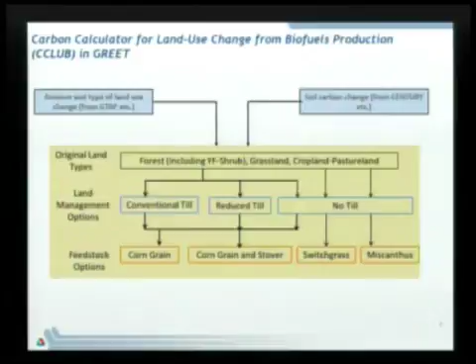There are several factors that affect land use change GHG emissions: crop yield on existing cropland versus new land, and global yield differences and potentials. These are important factors rolled into CGE models to generate results.

The next group is available land types. We know cropland, grassland, forest land, wetland, etc. Different lands can roll into cropland to grow corn and other grains. In the last several years, significant effort has been made in those models to update the land availability data.

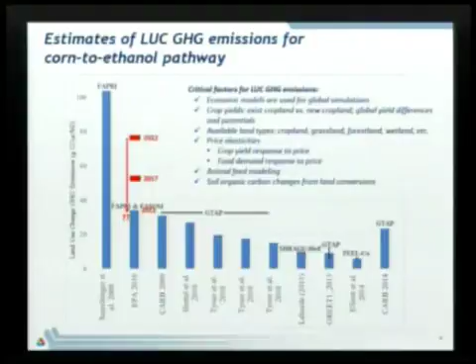So to roll all the results into GREET, this is the summary of what we see from GREET modeling, putting all those critical factors in. As you can see, for corn ethanol versus gasoline, even with land use change, we see a reduction in the 25 to 33% range. And of course, when we move to sugarcane, corn stover, switchgrass, miscanthus—the so-called second generation biofuels—we have significantly increased GHG reductions.

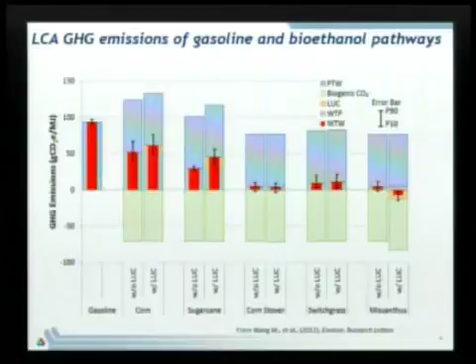And some of us may still wonder about the energy balance debate of corn ethanol, whether corn ethanol has a positive or negative energy balance. Here is our GREET simulated result.

So we conclude that because of the advancement in farming and ethanol plants, corn ethanol indeed has a positive energy balance. In fact, the energy balance is 10.1 megajoule per liter of ethanol produced. In terms of energy ratio, it's about 1.6. Of course, other second generation biofuels have a larger energy ratio.

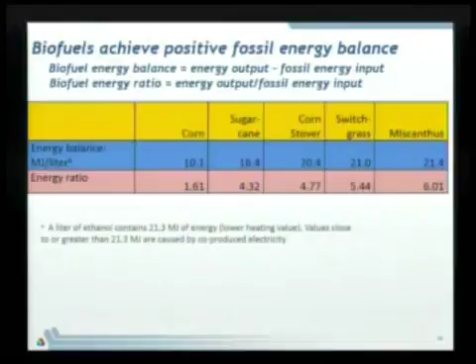So, some new trends for ethanol production. In the last several years, ethanol plants started to extract oil and use the extracted oil for biodiesel production. So we now configure the biodiesel production from corn oil in GREET 2014. You're going to see GREET 2014 in 2 weeks.

Another new trend is production of corn grain-based ethanol and stover-based ethanol. We've seen the plant just came online a few weeks ago, where the 2 plants are co-located, so you have some heat integration to benefit both sides of the fence. So we are examining this new unique co-production of ethanol in GREET 2014.

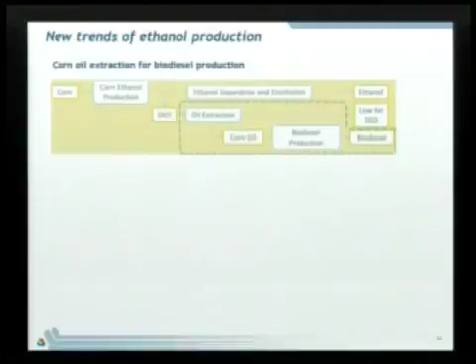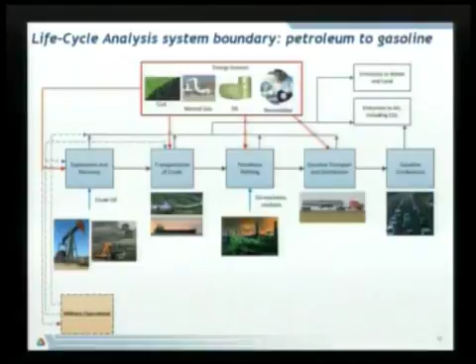So now let's quickly go through our result for petroleum to gasoline. This flowchart summarizes our system boundary for petroleum to gasoline. Of course, we include all the major activities for the gasoline pathway, as you see in this flowchart.

And in the last year also, we started to address a few critical issues for petroleum fuel pathways. For example, we spent considerable effort to address petroleum refining to gasoline, diesel, jet fuel, and others, with LP modeling effort to address refinery efficiency and emissions. And we have 2 journal articles published to document our findings.

And for oil sand, we update energy use and GHG emissions of recovery activities with Stanford University. And we address the land disturbance-related GHG emissions with UC Davis. So the results are rolled into GREET 2014.

At this point, we are analyzing some other crude types. For example, the tight crude production in the Bakken play and the tight crude production in the Eagle Ford play, especially the natural gas flare in the Bakken play. So we anticipate to have results in a few months to roll into GREET.

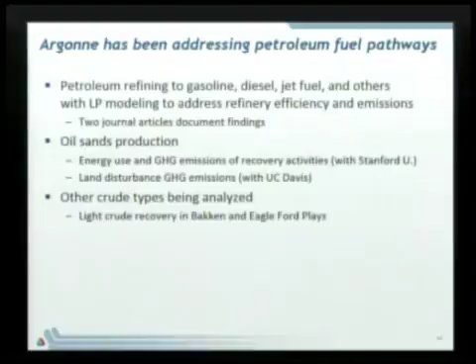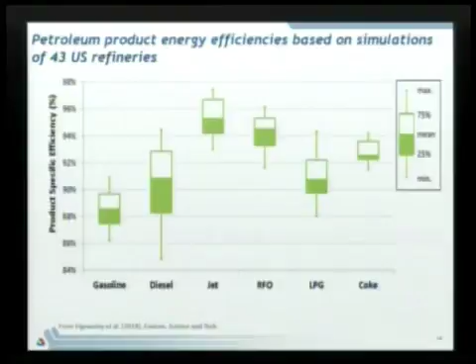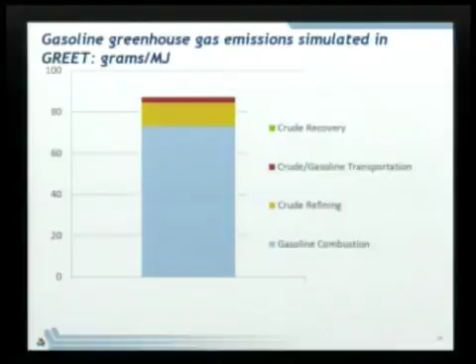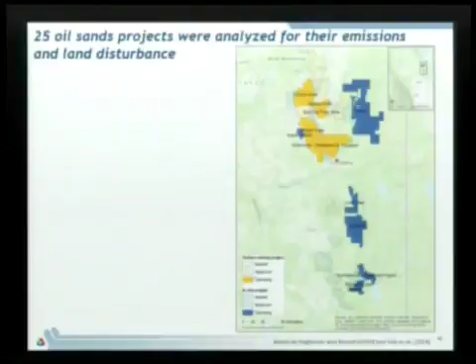And on the other hand, if we look closely at the oil sand result, with our collaboration with Stanford University and UC Davis, we addressed 25 oil sand projects in Alberta. Here are the project distributions in northern Alberta. So we have both mining operations and in situ operations. And here are the results from this effort.

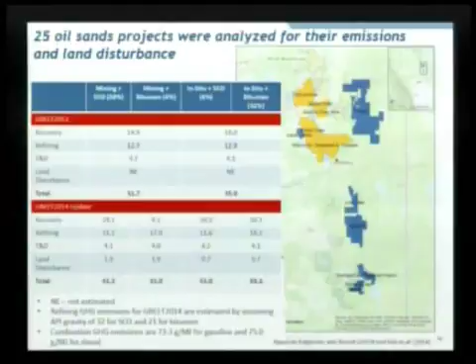So the table above, GREET 2013, is what we have now. The new result is GREET 2014 update, as you see. We see a significant increase in oil sand related pathway carbon intensity. For example, for mining operation, we increased from about 32 grams to about 41 to 51 grams, depending on the type of product. For in situ, we increased from 35 grams to about 43 to 51 grams. So these are the new results you're going to see in GREET 2014.

So just quickly in conclusion, technology improvements in ethanol plants and corn farming have helped reduce corn ethanol GHG emissions. Land use change modeling for corn ethanol has improved in the past 6 years with reduced moderate land use change GHG emissions. But uncertainties and confusions remain, and the debate continues, as we all know.

So this is where I hope that the community together can address this, because we know what are the key factors that drive the result differences, and the community and agencies together can get some of the issues resolved, so we can have better results and more transparency in what are the critical factors causing this important result. And on the other hand, the transition to cellulosic biofuels will result in greater GHG reductions. Thank you for your time.

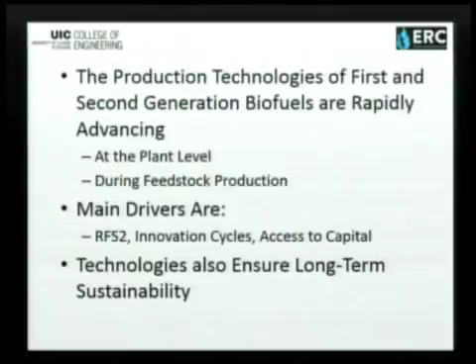This is a list that's hard to read, and it's hard to read because there are a lot of new technologies going into ethanol plants. I mentioned combined heat and power technologies, which are more traditional industrial energy efficiency technologies. But there's also new processing technologies like selective grinding technology, protein recovery, more sophisticated animal feed production at the back end, which is a very important point for a corn ethanol plant. It's a big component, and I'll come back to that later. And that's just on the ethanol plant side.

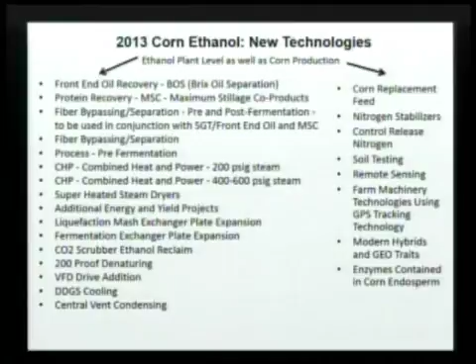Then on the feedstock production side and the corn production side, we've also seen large pushes in technologies: new hybrids, GPS technologies, auto steer on tractors, variable rate nutrient applicators, nitrification inhibitors that prevent runoff of fertilizer. So it's been a very vibrant and active field in that space. And what have all these technologies brought?

Well, on the plant side, we've seen a significant reduction in thermal energy use, meaning natural gas use. In 2001, we used 36,000 BTUs to produce a gallon of corn ethanol. In 2012, we used roughly 24,000 BTUs per gallon. During the same time, we've seen a 7% yield increase at the plants. Electricity use has also gone down during the same time frame.

And one of the technologies that Michael mentioned that we've seen rapid adoption in is corn oil separation, the production of a separate fuel product, because most of the corn oil goes into the biodiesel market or the animal feed market from that same feedstock. We've also seen a reduction in water use from about 5 gallons only a couple of years ago to now about 2.5, 2.7 gallons per gallon of ethanol produced.

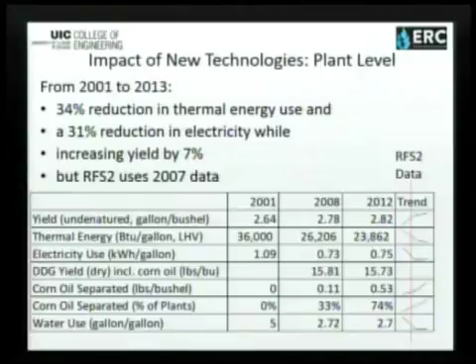One point I want to make is we're obviously a huge supporter of the RFS2 and have provided data and review. Updated modeling, in my opinion, is needed at EPA to reflect these new numbers. Back when RFS2 was modeled, they used the latest numbers, they used good numbers, but it's a very rapidly advancing industry and technology, and we need to update the numbers there. I've just shown you what happened on the plant level.

Well, on the corn feedstock level, we have seen, no surprise, record yields this year. We're going to be expecting 170 bushels per acre on average across the U.S., across the 2,500 counties that grow corn. And that is significantly up from the 5-year trend. But even last year we had very high yields.

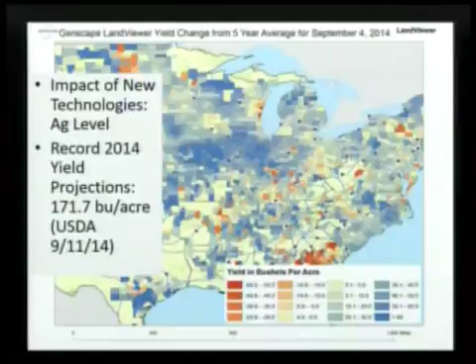And even during the drought year in 2012, we did not have a crop failure as would have been expected from the prevailing weather pattern. We still grew a very sizable and robust crop back then. And that is due to the new technologies, the new seeds, and the new agronomic practices. A couple of technologies worth mentioning here, especially corn kernel fiber to ethanol.

New enzyme manufacturing, new enzyme products really make it possible to turn 6 or 8 or sometimes potentially 10% of corn kernel fiber, to turn corn kernel fiber into about 6 or 10% of additional ethanol at traditional starch ethanol plants, and that's cellulosic ethanol, right, eligible for D3 RINs. We've seen Quad County Corn Processors adopting that technology, just started up in July very successfully.

Remember when I told you that corn oil separation was very rapidly adopted within 5 years by almost all plants? There is a potential for that technology to be rapidly adopted as well, because it's ready. And the potential with that is 1 billion gallons of cellulosic ethanol just out of the existing fleet of current starch ethanol plants.

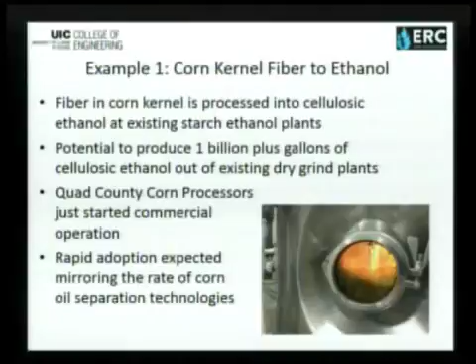Example 2 is corn replacement feed. I want to talk about that just for a little bit because it really speaks to the land requirements for corn ethanol production. What's been happening is that higher corn yields have also increased the amount of plant residue that is left after the harvest. And it's becoming a management issue. So a lot of growers have started to remove it. And many times it goes into bedding or it goes into animal feed. If you pre-treat it with 5% lime to increase digestibility, it can go into an animal feed.

Obviously the removal rates vary by region, right? There's a certain sustainable removal rate, beyond which it does not significantly impact soil health, and we have to be very mindful of that, right? That we do not deteriorate soil health. But the appropriate removal rates can be pretty easily determined.

So if, for example, at a 170 bushel per acre field, we remove 30% of corn stover, right? That's equivalent to producing an extra 50 bushels of corn from that field. Again, it's like getting a 30% land use credit. That is animal feed grown on land that's not, basically we don't need this land to grow this portion of animal feed. It's a land use credit.

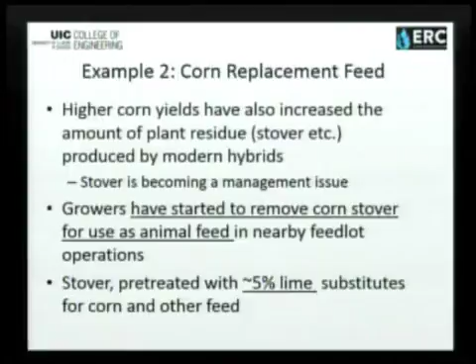And I want to conclude my presentation with the thought that I said earlier. I think it is important to prove and record the sustainability of the industry. Whether this is during RIN verification, as the EPA has instituted quality assurance programs that verify that a RIN is truly a RIN and prevent fraud. So we all know if we buy a gallon of renewable fuel, it was produced under renewable conditions, and it is what it is. Very important.

There are also third-party verifiers out there. There's a tool being developed that allows benchmarking of fields, farms, to see where they rank in their sustainability efforts, and there are certification agencies out there like International Sustainability and Carbon Certification that certified a lot of ethanol going into the EU back when there was still a market, before the EU imposed a tariff. But I think sustainability efforts should be supported.

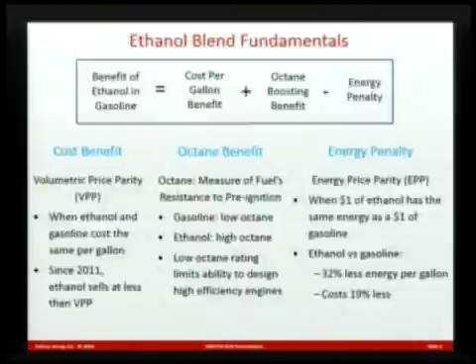Being kind of a curious person and into economics, we wondered why that happened. The one thing that correlated was the expiration of the tax credit for corn ethanol and the lifting of the tariff on imported ethanol at the end of 2011. That seemed to change everything.

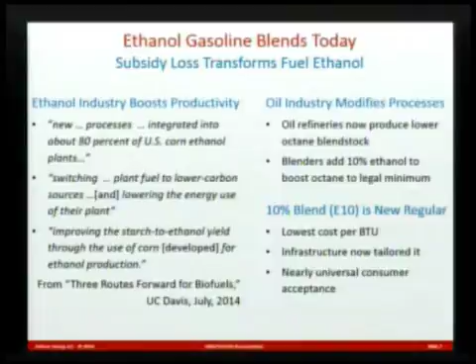The bottom line here is that, like milk, studies about the economics of ethanol tend to have an expiration date. You probably shouldn't use it if it was done before 2012. In fact, some of the government models that model the economics of ethanol actually have built into them the old assumption that ethanol and gasoline cost the same per gallon. They don't anymore. And even if the study was released after 2012, you have to kind of dig through it.

There's the NERA study that API put out, and I have a lot of respect for NERA. They're one of the really good economic analysis firms. They published a report in October 2012. Well, it turns out that phase one of that report, that everything was based on, was actually published in November 2011, before anybody foresaw what the effect of the elimination of the tax credit and tariff protection would do to the economics of ethanol.

Similarly, the latest CBO report has 21 studies in it that were published before 2012. So if you go through that report and take a Sharpie and mark out the findings from all the older reports, it's a much different report with much different findings than the one most of you have read.

So now I want to go on to octane, because that's really what I'm excited about as a former engineer, an auto person, and I'm kind of nuts about cars. I would like to see more of it.

Ethanol. First of all, octane can be boosted two ways. Blend stock is 84 octane and can't be used in the car as is; it has to be boosted at least another 3 octane points to be legal. You can either do that at the refinery or using ethanol. If you do it at the refinery, it's going to cost money to take that lower octane blend stock and boost it.

How you calculate what that cost is, is kind of a controversial subject, and the oil companies aren't exactly forthcoming about those sorts of things. So there are 3 studies I looked at. The one we did came up with 11 cents a gallon to get that additional 3 octane. APF Economics calculated it using a different methodology at 11 to 17 cents, and Hart Energy came up with 14 cents. So I think our 11 cents looks pretty good, all things considered.

So that's what it would cost if you didn't have ethanol. Now, if you use ethanol and add that 10%, you can boost the octane by 3 points, making the gas legal, and reduce the price at the pump by 5 cents a gallon, because ethanol is cheaper. That's the difference at the pump. If you use pure gasoline, it costs 11 cents a gallon more than blend stock. If you use ethanol, it costs 5 cents a gallon less than blend stock.

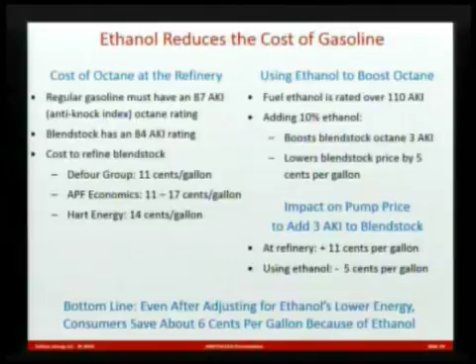So even after you consider the energy difference I talked about, right now gasoline to the consumer is about 6 cents a gallon cheaper because ethanol is used to boost octane rather than doing it at the refinery. Multiply that over 120 billion gallons, and as Everett McKinley Dirksen said, a dollar here and a dollar there, and pretty soon you have real money.

So this octane benefit can even be applied to higher blends of ethanol. The highest blend for sale right now is E85, 85% ethanol, and it's never been a value proposition for consumers. But some enterprising ethanol producers... now, to make fuel ethanol you have to denature it, because otherwise people would be more likely to put it in their cocktails than their gas tank. The oil companies denature it by putting in blend stock at 2 to 5%.

The ethanol producers do it by putting in something called natural gasoline, which is actually a natural gas compound. It's a liquid with properties very similar to gasoline, but it only has about 30 to 50 AKI octane. Of course, if you insert that into ethanol, it doesn't make any difference. So these ethanol producers said, why don't we put more in, create E85, and sell it directly to retailers?

And that's happening all over the Midwest. In Michigan they call it the Yellow Hose program. What happens when you do that: we had calculated you needed to sell E85 at 72 cents a gallon less than regular in order to make it a good value proposition. In the Yellow Hose program, it sells for $1 a gallon less than regular.

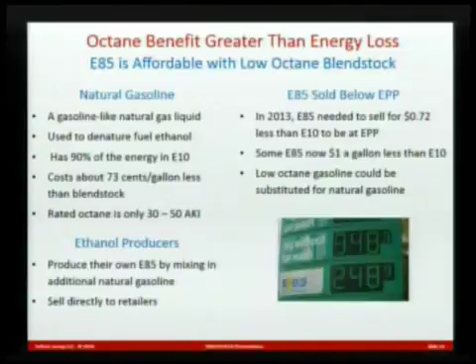But the real question we ask is, what's the sweet spot? What's the best blend? I'll get to that in a minute, but first I want to point out — I mentioned energy price parity earlier. It turns out that depending on who you look at, or what studies you look at, that may happen soon or may happen later. This chart shows the price of ethanol as a fraction of the price of gasoline. If you look down there, you see my energy price parity line.

The University of Missouri estimates that the price of ethanol versus gasoline will fall and actually be below energy price parity this year. The CBO, in their report, and you have to go to a footnote to find this because they don't really trumpet it, looked at futures prices and decided that by 2017, the price of ethanol would be about the same as that of gasoline on an energy basis.

So here's two different groups coming up with basically the same idea. Sooner or later, ethanol is going to be selling cheaper on an energy basis than gasoline. And that, of course, changes everything. Almost anything you put ethanol in will be cost effective.

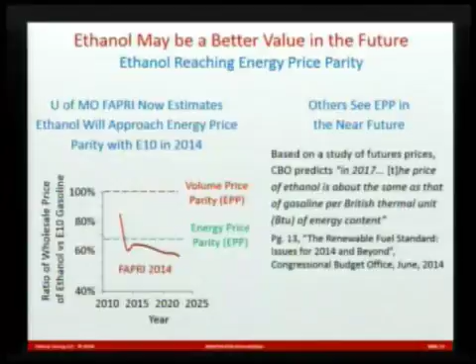But then we ask ourselves, what's the most cost effective way to use ethanol? And the most cost effective way is to maximize its octane boosting potential. Now there's various names for what you might call this concoction. We like to call it eco-performance fuel, or EPF. I hope to get royalties on the name tag, maybe, to augment my pension.

But the auto industry says that what they want is 98, what's called research octane number, which roughly corresponds to the 93 octane that's in premium gasoline today.

Now, ideally, you'd want this to be made with proven components, because the history of boosting octane has not been good. They started out with lead, then they used MMT, then other compounds. They all got banned for environmental reasons. So it's really nice if you could start out with something where we know what the environmental effects are. Ethanol fills the bill for that.

It's already successful in E10, so if you add more to the gasoline, to the blend stock, to bring the octane up to 98 RON, where premium is, you would create a fuel that would allow the auto manufacturers to increase engine compression ratios and improve efficiency, meaning lower CO2 emissions, better mileage.

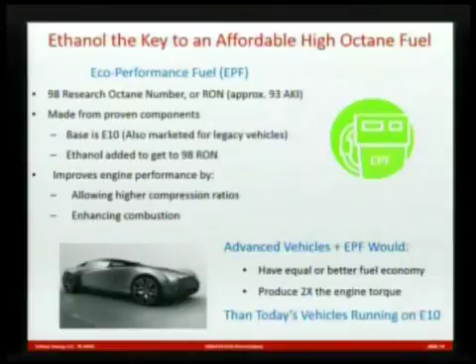It's cleaner, as I mentioned, because of lower CO2 emissions and also lower toxics, because in order to take gasoline at the refinery and boost its octane, you got to use a lot of compounds that, while they're not benzene, are very similar to benzene. So the advantage of ethanol is you avoid that.

Also, as I pointed out, it's cheaper per gallon now, and the price is going to go down even more. So you can see that if you went from, let's say, 10% now to 30% in EPF, you would be boosting the octane to what the auto industry wants, and you'd be lowering the price.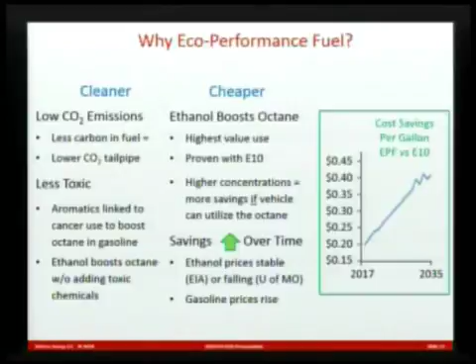Now, assuming the oil industry would then pass all of that on to the consumers, which is another discussion entirely I don't have time for, the consumer, if you did it today, or in the near future, would see about 20 cents a gallon less than regular gasoline today, and they'd be getting a gasoline that had the octane of premium. That would increase by 2035 to 40%, or 40 cents a gallon, a substantial savings at the pump.

Bottom line, this is a low-cost way to meet our national energy goals: reduce foreign oil dependence and also lower greenhouse gas emissions. There are a number of programs that have been instituted to accomplish this, but most of them cost the consumer money. Just as a quick comparison, if you take a look at an electric car versus eco-performance fuel, a Tesla costs about close to $500 for each ton of carbon dioxide that you reduce.

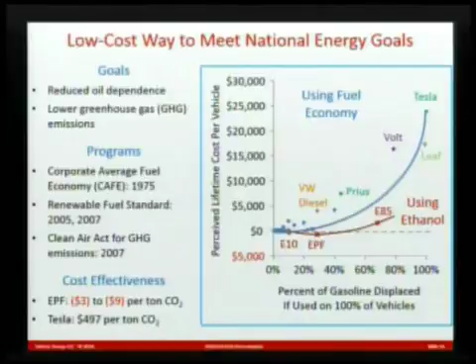Okay, I'll wrap up real quick, only one more slide. The EPF saves $3 to $9. I won't go through this in detail other than to say, if you compare it to other renewables, ethanol is unique in that while no renewable can completely at this point in time replace all fossil fuels, only ethanol displaces fossil fuel by about the same amount as some of these other renewables, but also saves the consumer money.

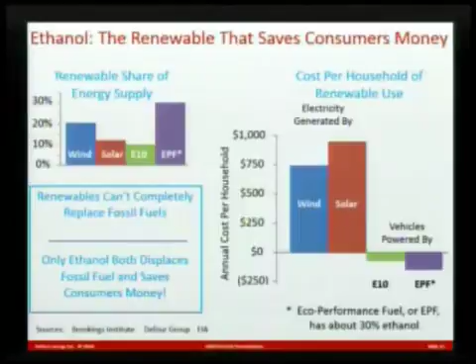In that regard, if we can maximize its utility through EPF, consumers will save more money, the economy will be stronger, and we will be using a whole lot less oil. Thank you.

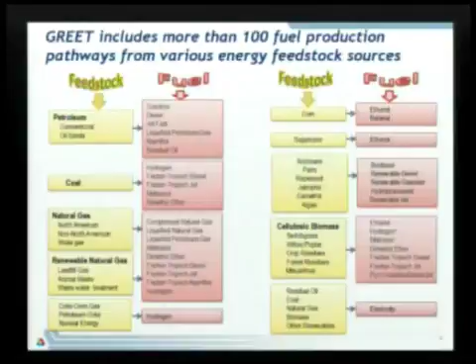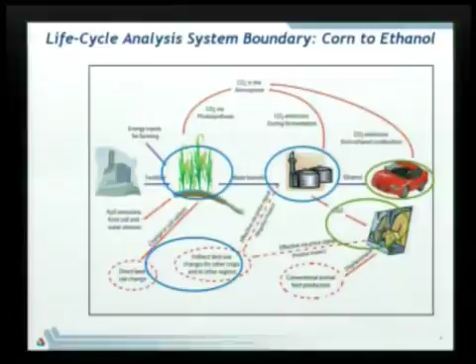This chart shows the three key areas I cover: farming, ethanol production, and direct and indirect land use change. The other two areas, vehicle use and the co-product DGS, I'm not going to touch on. And as I said, this is the chart of the ethanol plant.